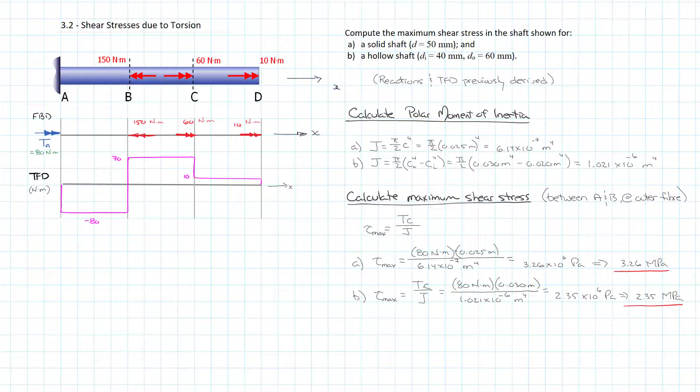So there was one thing I wanted to point out, and that's the efficiency of the hollow shaft. We haven't got there yet. We're going to get to the I-beam and flexure and everything else, and why that is so efficient in the use of material. But we'll get an early insight into that kind of thinking when it comes to the hollow shaft. So very quickly, I'm just going to calculate out what the areas are for my solid shaft and my hollow shaft, which is analogous to the amount of material needed to fabricate those two different structures. And so I'm just going to write it out here quickly.

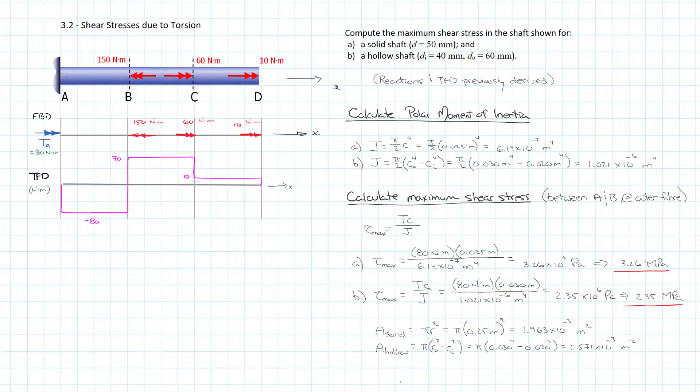But what I wanted to point out in all of this is that the amount of area of the hollow shaft used in this instance is considerably less than what we used in the solid shaft. I mean, in effect, it's actually about 80% of what we used in the solid shaft. So the material used in the hollow was considerably less than the material used in the solid shaft.

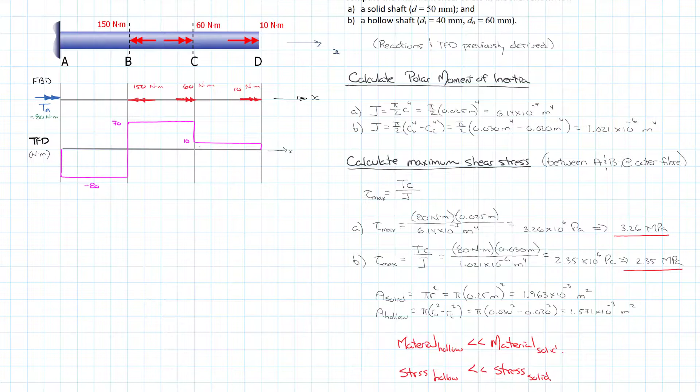And at the same time, when we look at a comparison of the stresses resulting from it, we had considerably lower stress in the hollow shaft than the stress in the solid shaft. And so, despite the fact that we use considerably less material, we also resulted in considerably less stress. And this really does point to the efficiency of the tube as compared to the solid shaft.

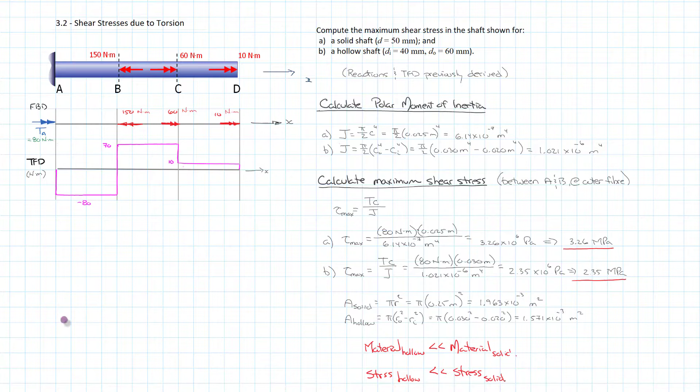And we can get into this later when we sort of plot it out and all that, and how we want to use our material most efficiently and effectively. But I wanted to show it here because we had the math sitting in front of us. So that's it as far as calculating shear stresses resulting from torsion in our simple shaft. And we're going to go from here. We're going to look at the deformations or the angle of twist resulting from it.

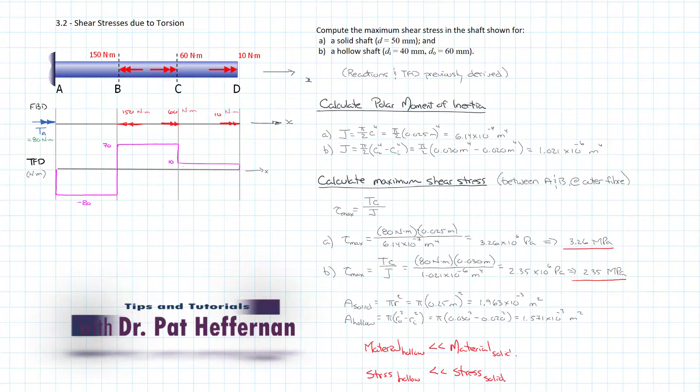And we'll use exactly the same problem. So we're not going to redo a whole bunch of calculations. We're just going to go on and see how this particular shaft would deform as a result of the torques put on it.